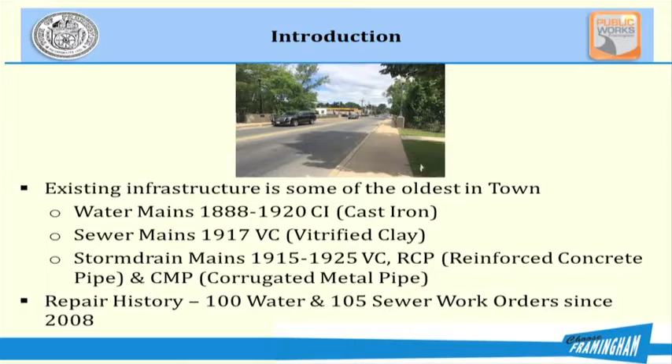The reason for this project - there are multiple reasons, but one is that the infrastructure in this section of Union Avenue is well over 100 years old. The water mains were built in the late 1800s, and the sewer and drainage pipes were installed in the early 1900s. The materials used to construct this infrastructure are well beyond their useful lives. Since 2008, we've had over 200 calls for emergency repairs. Rather than deal with things on an emergency basis, which causes more disruption and is more expensive, it makes a lot of sense to just go in and fix the infrastructure.

Also, the water pipes have a lot of service leaks, and the mains themselves have leaks. There are hydrants that don't work properly, there are valves that don't work properly, and there have been complaints about dirty water. So the improvements we're going to do to the water system will help alleviate all of those issues. And the materials and configuration of how things were installed don't meet current standards.

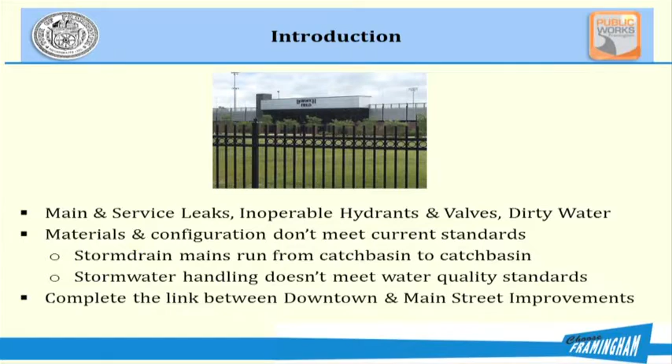The drainage system doesn't meet current water quality standards. It was constructed with catch basins going directly from catch basin to catch basin. It's called a daisy chain system. The way we do it now is the catch basins run to a main pipe in the center of the road, and that helps with capacity and flow issues.

This project will be the connector between the Main Street work that was just finished and the work going on in the downtown now. So when all of this work is completed, from the bridge at Edgell Road and Main Street all the way down to the downtown, we'll have all new water and sewer pipe.

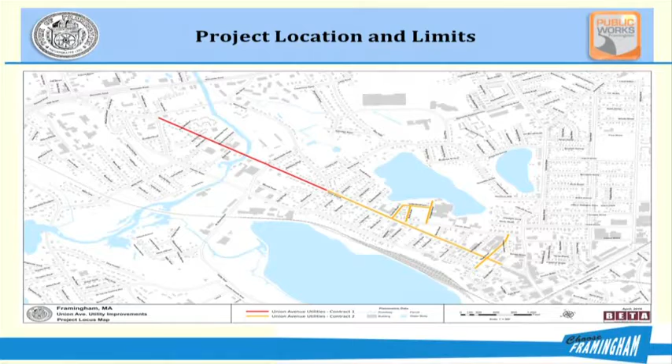Just quickly, this is a map of the location of the project. The red is this first contract, Contract 1, which is what I'll be focusing on tonight. The yellow is Contract 2, which will be the follow-up project. You can see it goes most of the extent of Union Ave.

This Phase 1 project, Contract 1, will be from Main Street at Buckminster Circle down to the Sudbury River Bridge, right behind us. Phase 2 will go from the Sudbury River Bridge to the Mount Wayte Avenue intersection, a very short section. Phase 3 will go from Mount Wayte Avenue down to Walnut Street. The follow-on contract will go Walnut Street to Proctor Street and also include some of the Evergreen area.

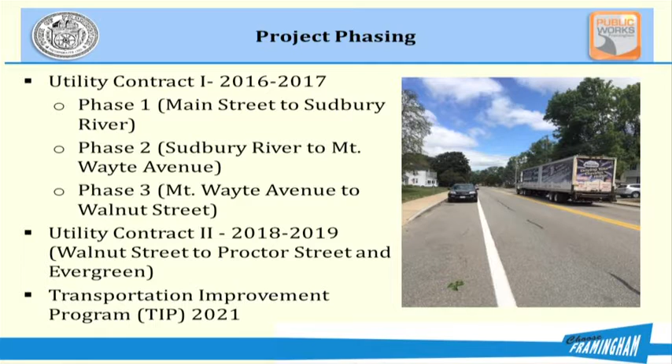After the town is done with all of this work, Mass DOT is coming in to do a street improvement project. They'll be fixing the streets, the sidewalks, and doing a beautification project. So this first phase is really just a small part of a much larger project that will result in huge differences to Union Ave, both aesthetically and in beautification, as well as improving the infrastructure.

This Contract 1 involves about 4,000 feet of water main replacement, and the sewer main replacement is about 1,100 feet of actual open cut, digging up the road and replacing the sewer main. Then we're going to do about 1,800 feet of sewer trenchless lining.

Basically, they take a flexible cloth liner, insert it, invert it like turning a sock inside out into the sewer pipe. They fill the pipe with steam and pressurize it, and they actually cook the liner, so when they're done, they have a pipe within a pipe. The advantage is they're not digging up the street—it's a lot less invasive.

There are portions of the project where the pipe was in good enough condition to do that lining. There were portions where the pipe was so badly deteriorated that we weren't able to do that, and that's where we'll be digging. For storm drain replacement, we'll do about 4,500 linear feet, including new manholes and catch basins.

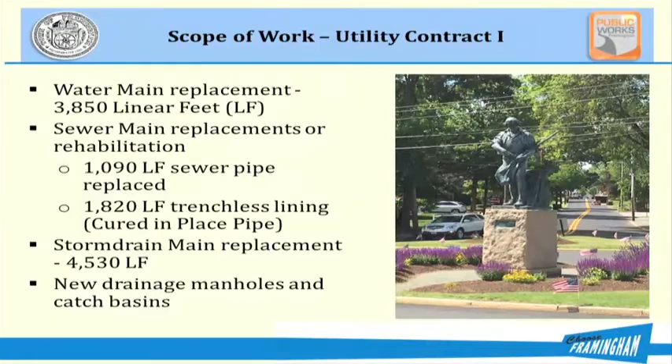Also, we'll be putting in 2 water quality units, so all of the new storm drain infrastructure will flow towards the Sudbury River. There'll be a water quality unit in the parking lot of the Callahan Center, and another on the other side of the river at Bowditch Field. These will help improve the quality of what's being discharged into the Sudbury River. These units will remove sediment, solids, oil, and grease before the water gets discharged—a great improvement to water quality in the river.

Another big part of this project is the removal of about 13,000 square yards of concrete road base. Union Avenue previously had trolley tracks that ran up and down, embedded in concrete that varied from 8 to 12 inches thick.

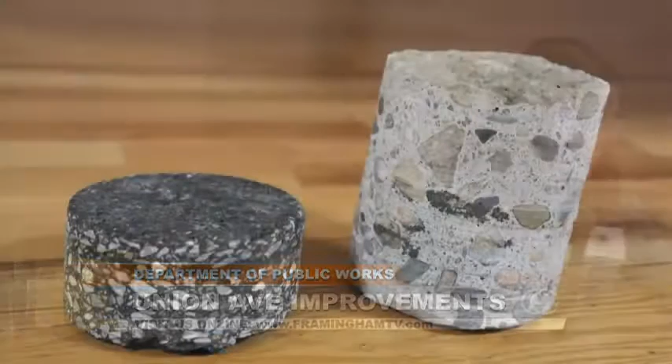This is a cross-section from some borings we did, pulled out of the road. It's actually on the smaller side—there are some areas that are much thicker. If you can't see it from where you're sitting, you're welcome to come up and take a look at the end. This sample is about 7 or 8 inches of concrete and about 4 inches of asphalt.

Like I said, the concrete ranges up to about 12 inches, and the asphalt goes up to about 7 or 8 inches in some places. So it'll be a significant effort for the contractor to dig all of that out as they go along.

So the first part of the project will be for them to remove all that so that they can get down and address the utilities.

There is also some old asbestos cement pipe in the road that will need to be removed, and that will be handled in accordance with all EPA and DEP standards. The contractor knows that they have to follow the correct protocol and make sure that it's disposed of properly and take all the appropriate safety precautions.

And then as they go, the contractor will be restoring the road base. At the end of all this, DOT will be coming in and doing a major road reconstruction project, so we'll do some interim restoration right now.

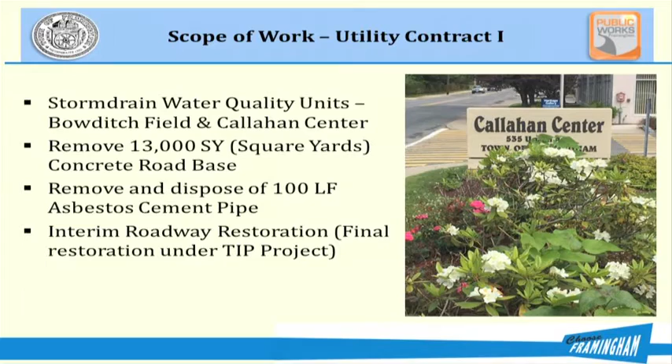One of the big issues, and probably a reason that most of you are here, is the traffic management. This is a busy street, and everybody wonders how we're going to handle the traffic during construction.

So our consultant, Beta Engineering, did a very thorough traffic analysis. They looked at 14 different intersections, signalized and unsignalized. They did average and peak traffic counts, both for Union Ave and Franklin Street, and then they looked at all of the side streets to find out which one would be the best street or streets to use as detours based on the ability for truck turning radius.

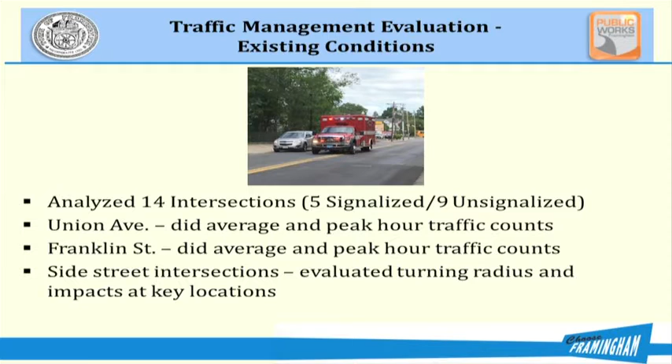So this is the limit of work for phase 1, from Buckminster Square all the way down to the Sudbury River. Let's see if I can.

Just to give you a frame of reference, this is where we are right now at the Callahan Center. This is Bowditch Field. This is the Framingham State University facility. So this is the extent of the entire phase 1, what we're planning to do this construction season.

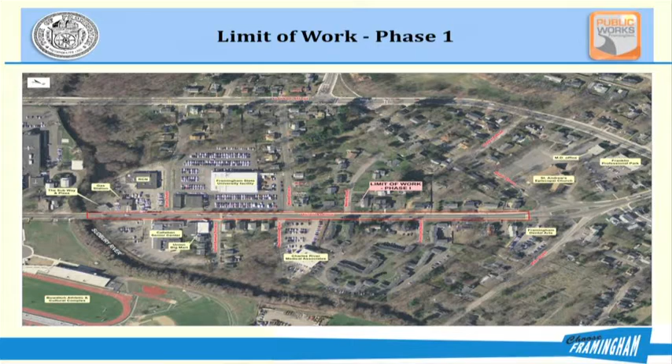So for the traffic management for this part of Union Ave, it will be closed down for construction, and it will be one-way north-only traffic. So there will be one lane open at all times, only in the northbound direction. It may actually be on the other side of the road, depending on where they're working, but it'll always be northbound, no matter what side of the road they're working on.

I should mention that our first line of defense here is we're going to put some signs out on Route 9, notifying the large truck traffic that they might want to take 126 if they're going towards downtown Framingham, and just avoid Union Ave and Franklin Street altogether. We're hoping that that will capture some of the flow and divert it before they even come off Route 9.

So here at Main Street and Franklin Street, we're going to detour the traffic down to Mount Wayte Avenue, and at that point, smaller vehicles, cars and smaller trucks, can go down Mount Wayte Avenue to get back to Union Ave, and they can then go either right or left, north or south at that point.

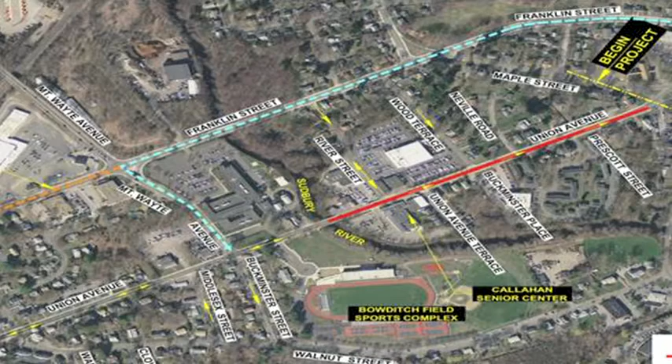Larger trucks, because this intersection really doesn't accommodate larger trucks, will be detoured further down to Arch Street, and then they can turn north or south at that point.

Anyone coming down Main Street, wanting to stay on Main Street, can do so. Anyone coming down Franklin Street, wanting to continue down Franklin Street, can do so. So the detour is really set up just to do a loop, basically, around the project area.

So if you lived on Neville Road or Wood Terrace, you would have to come around and do this loop and go north again to get to your street.

So again, this picture is the intersection of Mount Wayte and Union Ave. You can see that's a small car trying to turn, and it's in the other lane. This would not work for large trucks.

One-way traffic northbound through the work area, two-way traffic south of the Sudbury River, and the detour as we just talked about.

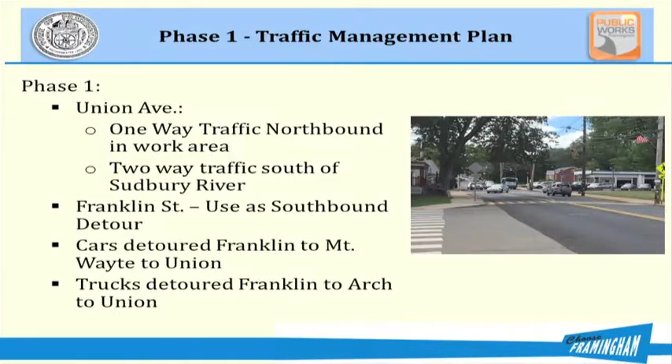Another key aspect is that our consultant looked at the signal timing at key intersections: Main and Franklin, Franklin and Maple, Franklin and Mount Wayte, and Union and Mount Wayte. They will be adjusting the signals to optimize the flow of traffic through the detour.

We really wanted to encourage people to use the detour and not use the side streets. Obviously some local traffic will find their own way, but for the majority of traffic heading downtown, we want them to use the detour, and the lights will be set up to make that optimal for them.

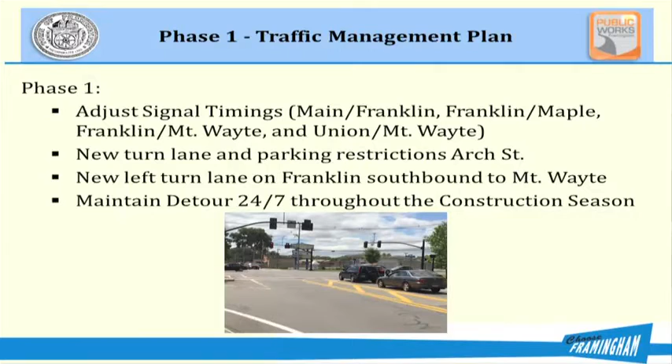There will be a new left turn lane on Arch Street and parking restrictions on Arch Street, so traffic coming out back onto Union will have a left turn lane and a right turn lane at that point. This is Mount Wayte and Franklin, where there'll be a designated left turn lane to turn and go back down to Union Street.

This detour will be maintained around the clock throughout the construction season, so it won't change at night or on the weekends. We want to make it as simple as possible for people to know how they're supposed to navigate this area and where the construction zone is, so we decided to keep it the same all the time throughout the whole construction season.

Yes, the school buses will be rerouted too. We've been working with the transportation director, and he's well aware of this project. He actually weighed in on our traffic management plan, and we got some input from him.

So before I go on to phase 2 and phase 3, the phase 1 work is the work that will be done this construction season. Does anybody have any questions?

Yes ma'am. What does this construction season mean? When does it start? I'll get into the schedule in a little bit, but basically we're hoping that the contractor will start in mid to late July, and the construction season should go until about mid to late November, weather depending. We're just in the process of going over the schedule and signing a contract with the contractor, so as soon as we can get them out there, we will.

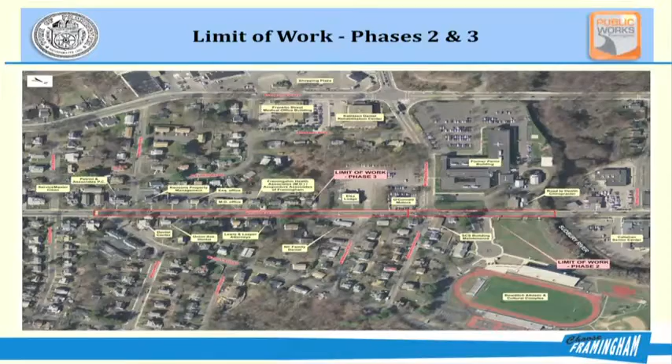The traffic management plan for phase 2 is somewhat similar to phase 1. Trucks coming in will still have the signage on Route 9. Trucks coming off of Route 9 can go down Franklin Street and will be instructed to continue all the way down to Melrose Street.

The reason we're using Melrose Street is we wanted to give the folks who live on Arch Street and in that area a break. Since they're going to be putting up with the detour this year, we're going to detour the traffic to another street in 2017. Melrose Street was the second best street for the truck turning traffic based on the analysis that was done.

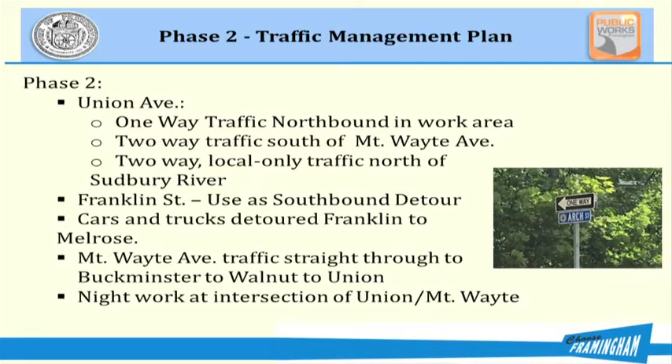Traffic coming east on Mount Wayte Avenue can go straight across the intersection and will be instructed to do so, looping back around to Union Ave. Trucks coming down Mount Wayte Avenue will be required to turn and go down to Melrose Street, just because this turn and this turn don't work very well for trucks. So it's a very similar detour.

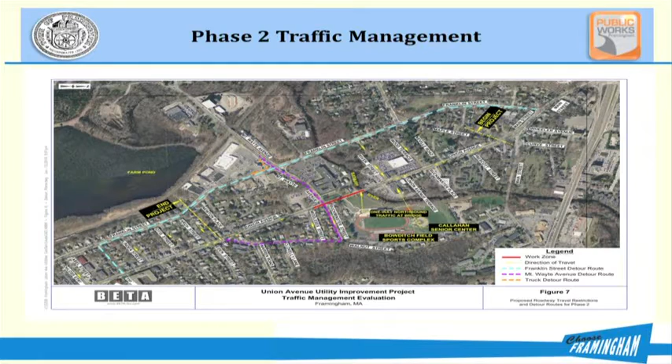Northbound traffic will still be maintained on Union Ave. Main Street will still be accessible as it is now. The big difference here is the traffic coming straight through from Mount Wayte Avenue and looping around, and the change in the detour to Melrose Street.

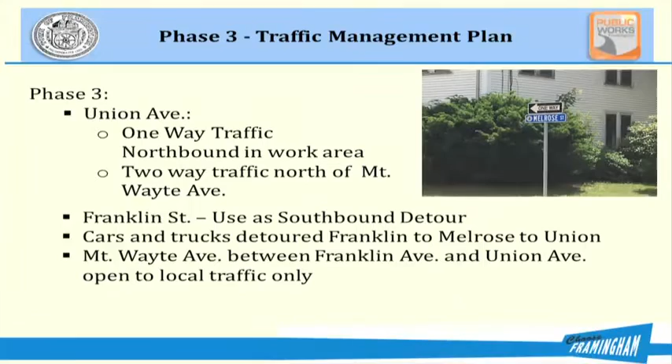The phase 3 traffic management plan will be very similar to phase 2, except that the work area has moved down. There will be two-way traffic on this section between Mount Wayte Avenue and the bridge, northbound only over the bridge, so again we're maintaining that northbound flow. Then north and south two-way traffic on the other side of the bridge. That's mostly to make access easier for the residents in this area.

So when we get to phase 3, if you live in this area, you won't have to do the loop around. Again, the Franklin Street detour will go down to Melrose Street. We expect phase 2 and phase 3 to happen within the same construction season, 2017, which accounts for the similarity in the detours, and hopefully it'll all get done within that time period.

So I'd like to, yes, absolutely.

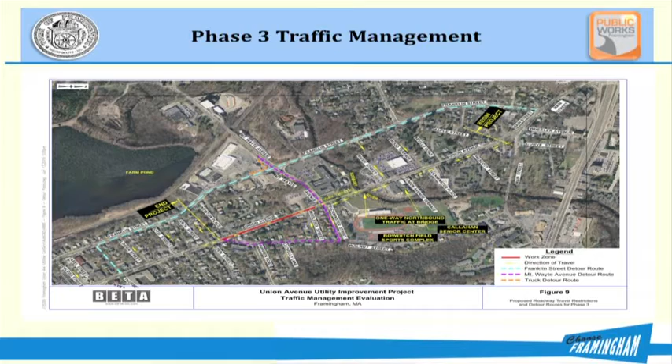One thing I wanted to add, and Vonnie touched on it a little, is the section of roadway between the Sudbury River Bridge and Maple Street. This will be two-way during phase 2 and phase 3. Southbound will be for local traffic only, so if you want to come to the Callahan Center from the north during phase 2 and phase 3, you'll be able to come south into the center. If you want to continue south when leaving, you'll have to loop around, but you'll be able to exit and head north.

Question: Framingham State University, considering their lot of parking, they park right beside our area. The Framingham State University lot is right here—they'll have to follow the detour just like everybody else.

Did you? Not directly, no. Yes, that's a good suggestion.

Some of the anticipated impacts and work hours and schedule issues: the work hours will be 7 to 5, Monday through Friday. There's only one portion of the work where we expect night work, at the intersection of Mount Wayte and Union, because it's such a busy intersection. The rest of the work at this time is planned to be done during the day.

Access within the work area—we talked about how traffic will need to loop around. The contractor will be instructed to use erosion control methods: straw wattles, which are like big long straw logs contractors put down to keep runoff from pulling dirt into the street when it rains, and catch basin inserts, bags placed in catch basins to collect sediment so it doesn't get into the storm drain system.

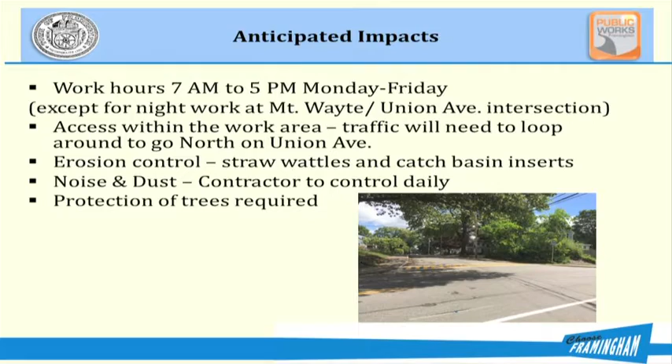They'll be required to control noise and dust. This is a construction project—it will be noisy and dusty, but they have to do everything they can to minimize that. Probably the noisiest part will be digging out the concrete and asphalt. There will also be a requirement to protect trees and other vegetation—no storing of materials or equipment within the drip line of large trees, that sort of thing.

During the project, as a resident, if you have any concerns you can call us and we can address that. Question: regarding ripping up the pavement, will they jackhammer or saw? Again, we can't tell them exactly how to do it, but they'll probably saw cut it.

We had those same concerns about vibration impacts and the like, so we've directed the contractor in the contract specifically that he has to saw cut the majority of it. And to follow up on that, before they start construction they'll set up vibration monitoring and do building inspections—coming around to take a pre-construction video, recording the pre-existing conditions of people's house foundations beforehand. When doing the work, they'll have a seismograph set up to monitor vibrations as well.

Question: I assume saw cutting is quieter than the jackhammer? Saw cutting is a little quieter, and hopefully a little less dust. Since you don't know exactly when they'll start, will you sign up to get notified when it does start? We will absolutely let people know when the exact start date is, yes.

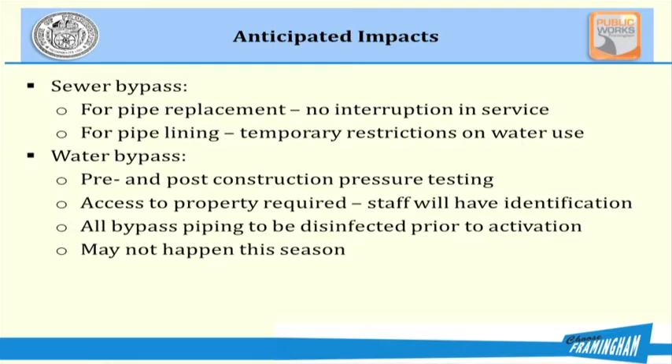This work may not happen this season. From the schedule we got from the contractor the other day, it looks like this work may go into next season a little bit for the water work, but we'll see how quickly they move.

Is that likely to be mostly houses right on Union Avenue, not likely to go over to say Franklin Street, or would some of that pipe go over somewhere near there? It should just be the houses on Union Avenue.

Any questions about the bypasses?

So this is the schedule as it stands now, and it's always subject to change, of course, but we're in the process of getting a contract signed. We're doing these outreach meetings now. We're hoping mid to late July they'll be starting construction. And then phase one, from July through December, the sequence of work as they've laid it out now is they'll remove the concrete base, they'll backfill, they'll pave as they go to help minimize dust and keep access open.

Then they'll come back and do the sewer work, which, like I said, is mostly lining. They will be replacing sewer manholes, and there will be a small amount of pipe replacement, but the majority is the lining work. And then the water replacement will follow that. And of course, with both the sewer work and the water work, where the new pipe is going in, they'll have to do service connections as well.

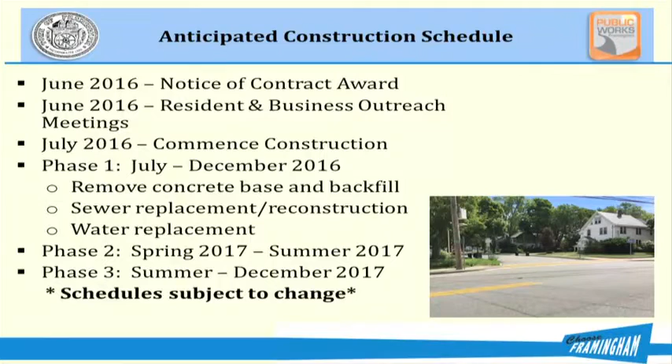Phase 2 will be spring and summer of 2017. And then phase 3, we're hoping will follow immediately and be the summertime through December of 2017. So our goal is to have it done in 2 construction seasons.

So in terms of your ability to get information as the project progresses, you can sign up for email and text message alerts if you go to Notify Me on the town website. The DPW has a Facebook page, Town of Framingham - Department of Public Works. The town website has, if you go to Building Framingham and then click on this project, you can get information about this project. And then you can always call the Capital Program Office or email us. We have somebody on call 24/7. Just if you call in off hours, please leave your name, the best way to contact you, what your concern is, and somebody will get back to you.